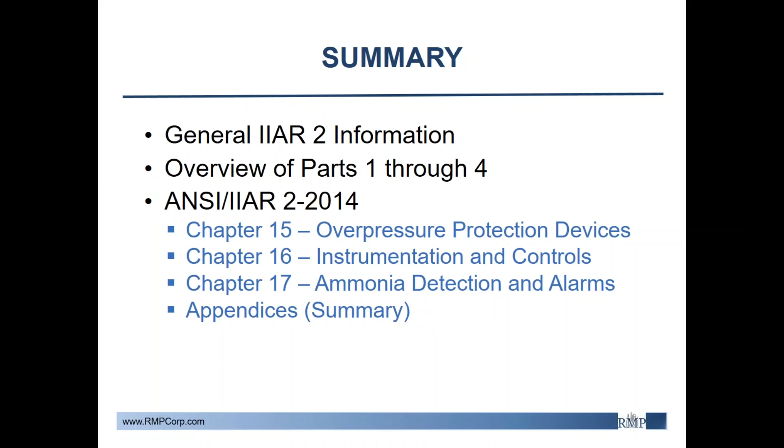15, 16, and 17 are actually probably some of the easier IIAR 2 chapters to implement as RAGAGEP. So I'll spend a little bit of time on that, and there's some extensive information, but we'll go through it, and I'll try to keep it as painless as possible.

This also is a reminder that IIAR 2 is for new system design, not existing systems. So this whole series has been based on IIAR 2 because there is no IIAR RAGAGEP standard yet, and we'll get into that later. IIAR 9 is in progress right now, and I have some dates that they're projecting for the release of that. So this presentation, as with the rest of the series, is formatted to take IIAR 2 and help you implement

and address issues that may be assigned to RAGAGEP under new design standards. Again, IIAR 9 is in progress, also IIAR 6 about the safe operations of the system, more into your maintenance and operating procedures, will also be developed around the same time frame next year. We'll talk about that a little bit later in the presentation.

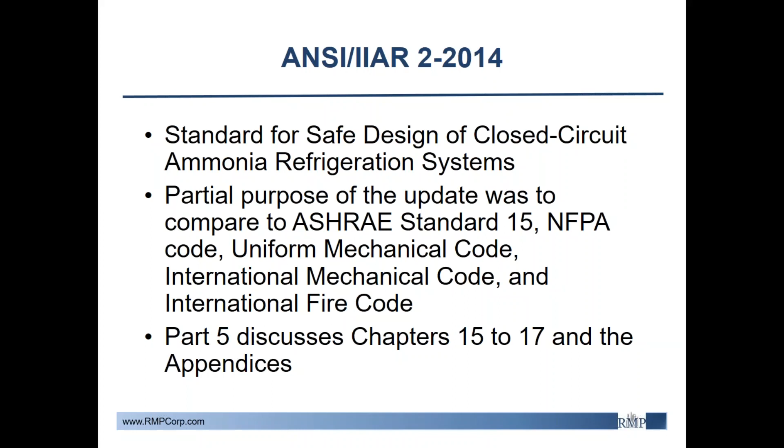It's also really important to remember it's never too late to start implementing RAGAGEP. Even if you're unsure, every little bit helps. Any assessment on what can be safer for your system helps.

We'll go through some quick definitions. A lot of them we've talked about before, but I always like to refresh and review for the ones that are most important for the presentation I'm giving. Authority having jurisdiction is basically your regulator or anyone else locally or federally or anything in between, where they have the responsibility of enforcing these standards.

Generally speaking, we're looking at the regulator for the facility, whether it be local or all the way up to federal. Authorized personnel applies to those that are trained and authorized to do a particular task or access a particular area. This is a big one. Whenever this is used, they're basically talking about authorized operator, authorized mechanic, someone who has the keys to a room that not everyone else has. So it's really important that there's this distinction between that and all the other employees on site.

Generally speaking, equipment is everything associated with the refrigeration system. I actually had this come up in the last few months where someone said, well, we never thought piping was part of the refrigeration system. I had never heard that before. I didn't know that was a challenge for some people, but it does include piping, your large equipment, valving, controls, anything associated with the system with controlling operations and maintenance is part of the equipment, generally speaking.

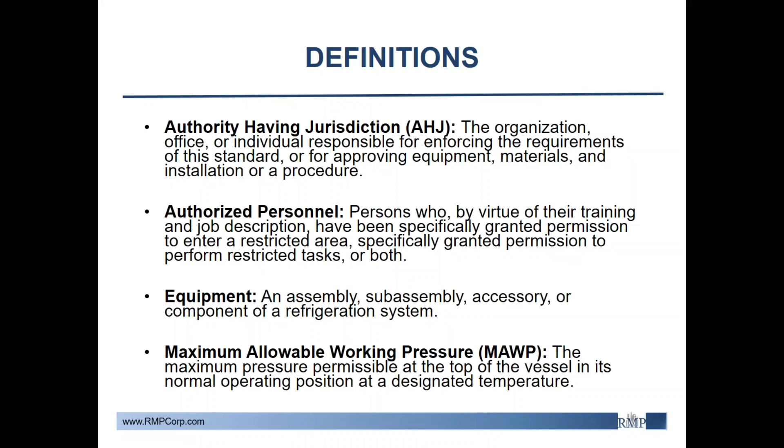Pressure relief valve, we're going to talk about these a lot today. Essentially, it's a device that relieves pressure. I think most people understand that. I pulled the definitions for the 3 pressure relief valves discussed in IIAR.

The hydrostatic relief valve is essentially designed to relieve pressure where liquid can be trapped. Pressure relief device is, more generally speaking, something that would automatically relieve excess pressure, so that could be vapor or liquid. It's just a more general term. And the dual pressure relief device is basically your three-way valve setup that we typically see with the 2 pressure relief valves, so you can isolate one and replace them and whatnot and have a backup.

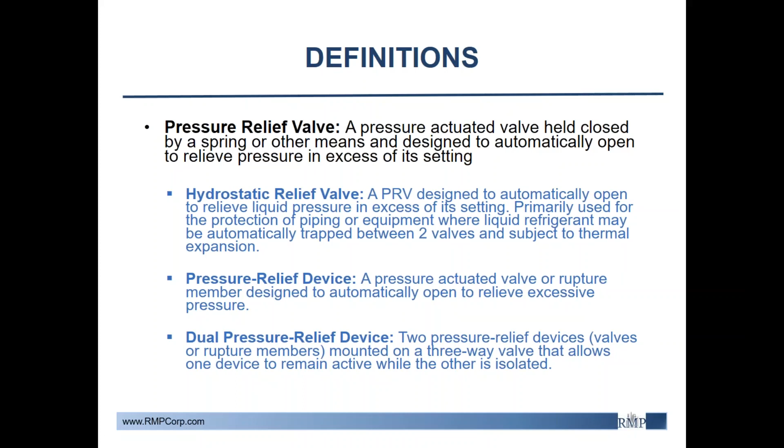Readily accessible is another big definition we've talked about this whole series. Readily accessible refers to anything that you may have to access as far as equipment, piping, valving for maintenance or operations. Essentially, if you have to get on a ladder or climb down a catwalk and twist over and lay down backwards to access a valve, it's not readily accessible. So this is stuff that's at normal person level. It can be up on a catwalk if the catwalk is easy to get to and easily accessible from the catwalk. We're just talking about no ladders and no weird contortions of the body to access things.

Shall not and should not are always terms I like to bring up. Shall is the mandatory provisions. Should are the recommended provisions. And basically it goes that even your shoulds should be followed if you can reasonably do that, and shalls are a mandatory thing. And 3-way valve, going back to our dual valve PRVs, basically a service valve that has a manually operated valve with 2 connections.

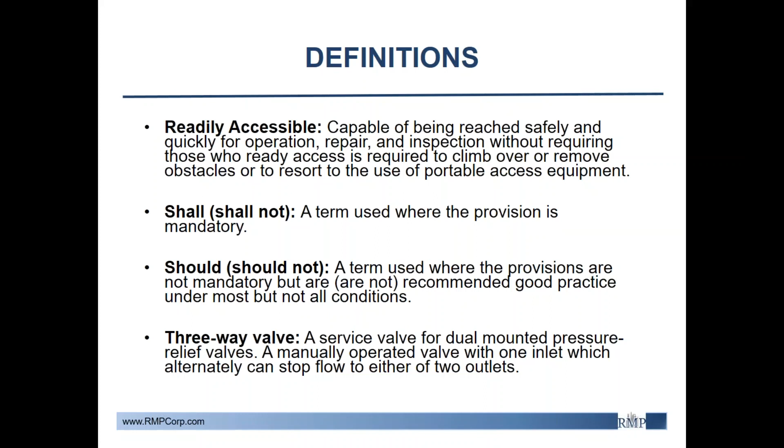So we'll talk about Chapter 15 on overpressure protection devices. 15.1 is a general clause. It's basically saying that pressure relief devices are going to meet the standards of this chapter. Almost every chapter has this general clause. I don't always write it in here, and this is one of those cases.

The overpressure protection devices do specify that excess pressure will be relieved due to fire or other abnormal conditions. Again, pretty self-explanatory. Most of us know that, but for the sake of stating the requirement, I like to do so.

15.2 for pressure relief devices just lays out some general requirements. One being that the system has to have at least 1 pressure relief device. Basically, you need to be able to relieve the pressure from anywhere in the system. And they must meet the ASME boiler and pressure vessel code. That comes up a lot. IIAR2 references that a lot. That's basically their mechanical standard or their material standard for most of the equipment in this standard. So you'll see that a lot, especially in this presentation for each device.

The installation should always allow for inspection, maintenance, and repair access, and this also goes back to readily accessible, that these should be readily accessible for access for any of these tasks. And if you're using it for vapor service, the pressure relief device should always be connected above the highest liquid ammonia level. That being said, there is an exception for that on, say, oil pots, where you may not be able to connect it higher than the anticipated liquid level, but you would just put it on the highest point of the oil drain pot instead. So there is one exception to that. If you're familiar with refrigeration, then you look at the designs, you wouldn't want to put your oil drain pot above, say, your compressor or something like that, where you wouldn't be able to drain your oil. So that's why they give you that exception.

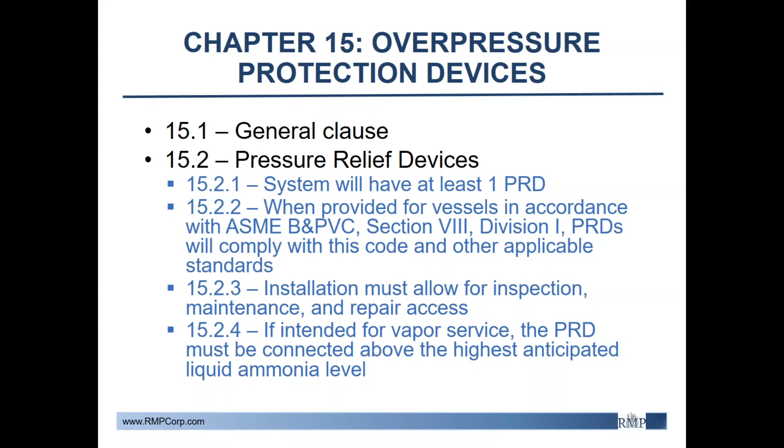The overpressure protection should also be installed as close as possible on the equipment being protected, and it applies to all similar applications. So if you have any other applications other than pressure vessels where you may need pressure relief, the same standards would apply to those applications as well.

Section 15.2.5 basically states that you need to prevent moisture from getting into the valves or the relief vent line. I think we can all understand what metal and water do together - you'd have a lot of corrosion and it would just be a nasty mess. So having vent caps, some kind of protection for that valve body against moisture, having everything properly sealed, possibly even coated or painted, will help protect the emergency protection you're trying to have with installing these valves.

Also, for setting or installing pressure relief devices, the pressure of the valve or device and the rupture member, if used in series, shall not exceed the design pressure of the equipment. Pretty self-explanatory, but you'd be surprised what we see as engineers. Basically, if you have a pressure vessel rated at 300 psi, you don't want a relief valve rated at 350. You'd like to go below 300 at a reasonable level in order to protect that vessel.

Also, there needs to be some means to detect pressure buildup. Usually I see a gauge, but there may be other methods - perhaps controls going back to your control system. Whatever works for a facility, whatever stage that facility is at, there just needs to be some method of detecting the pressure. As far as marking relief devices, they all must be set and sealed according to the boiler and pressure vessel code.

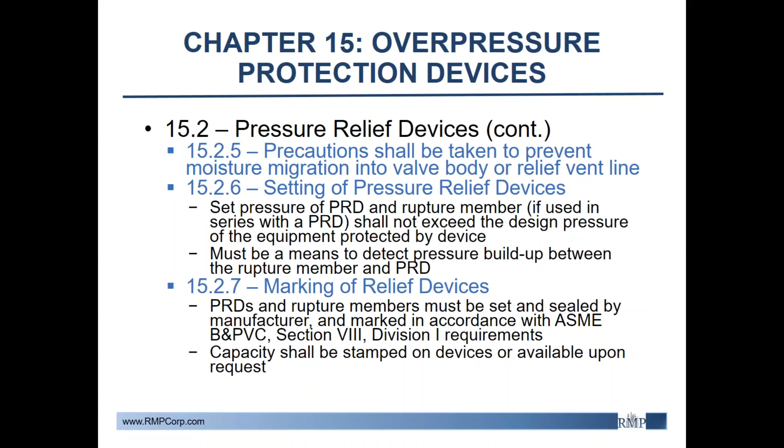So generally speaking about protection, all equipment should be built to ASME boiler codes and provided with certified pressure protection. Again, going back to the manufacturer, the testing certificate - you have qualified people installing and testing it, making sure everything's working as needed.

For the liquid vessels in your system, they have to have certified hydrostatic relief valves. This is pretty standard practice now, but if you don't have them, this is an easy one to alleviate from a RAGAGEP standard. Make sure you have these hydrostatic relief valves on your liquid vessels, or anywhere liquid can be trapped. It's an easy install, and it can alleviate that RAGAGEP issue if you're looking at possibly being deficient on that.

These hydrostatic relief valves need to comply with the ASME code we're stating, as well as section 15.6 of IIAR 2, which we'll get to in a few minutes. In addition, the sizing is in accordance with the section we'll be talking about next, section 15.3.7, where we'll discuss sizing and capacity.

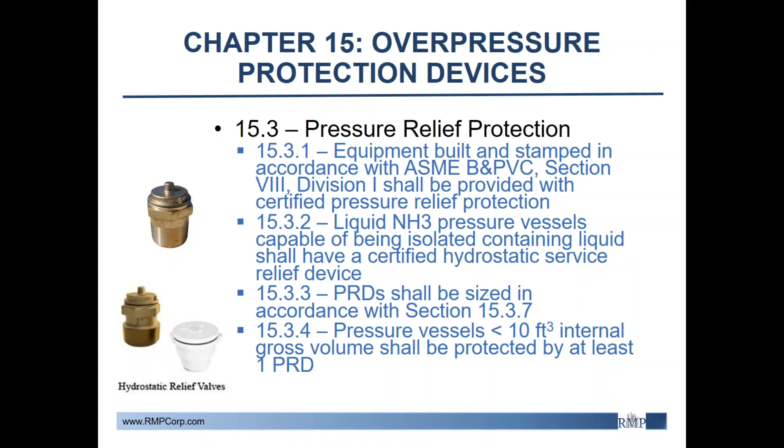Pressure vessels less than 10 cubic feet of internal volume must be protected by at least one pressure relief device. Pressure vessels greater than 10 cubic feet of internal volume shall be protected by at least one of the following. This is where it kind of gets confusing, but I'll help explain it.

Either one or more dual pressure relief devices installed with a three-way valve, or a single PRD. So you have the option - and again, these are minimum standards. You should always go with the safest standard that applies, or the safest installation. But you can have a single PRD, or they give you that extra option - maybe you should put some dual PRDs on these.

Have that backup plan just in case you have an issue. It's really based on the volume. You don't want that pressure to build up where this large volume would be an issue. So there is a little bit of difference at that threshold, but essentially they are the same requirement.

In addition, the dual PRDs must comply with the sizing that we're going to talk about on the next slide. They must set to a fully seated position, and the sum of the capacities must equal or exceed the requirements in 15.3.7, again on the next page, so we'll talk about that.

The three-way valves must allow for testing or repair, and when you talk about the single PRDs, the vessel can be isolated and pumped out in order to maintain that device or replace the device. And they should be on the low side of the system if you're only using one. So we're talking about the low pressure side of the system.

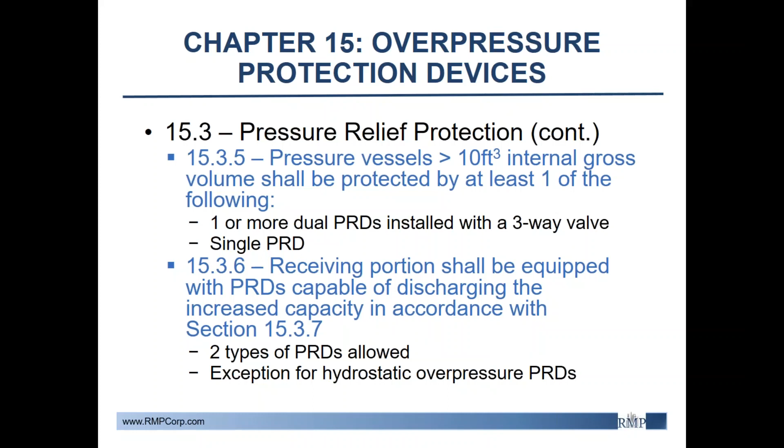The hydrostatic overpressure protection, basically they can be discharged to other portions of the system as long as those portions of the system are protected by PRDs. And again, in accordance with all the sections that apply, they would be like normal pressure relief devices, just a different part of the system, but you can connect hydrostatic relief back up into a different part of the system. For instance, if you want to put it back into a large vessel, it can handle higher pressure.

For 15.3.7, this is the capacity and the determination of flow rates and everything we've been talking about, so I'll go through this a little bit.

Basically, there must be sufficient mass flow carrying capacity within the vessels and within the relief protection system, the whole system, not just the valving, but the piping and everything that goes along with this part of the system, basically to prevent catastrophic failure. You don't want your emergency protection device to fail. That's your last resort. In a perfect world, we would have nothing go wrong and you would never use the pressure relief devices, but that doesn't always happen. And so this is your last resort and it cannot fail, which is basically what this is saying.

So to ensure that you have plenty of capacity there, they've listed out a number of considerations, including fire, any kind of isolation that will result in thermal expansion, some kind of internal heat load, and then there's this general other category. Basically considering any other overpressure conditions that may cause some issues in your system and utilize the pressure relief system, you need to account for all that capacity.

The minimum relief capacity depends on the equipment, the effects of the inlet pressure losses, and scenarios under which overpressure is being created. Again, going back to the second bullet of all those considerations that you have to take into account. Also, they must include heat loads from cleaning operations and process loads. So any kind of extra heat load that may expand your gas in the system is a possibility for extra capacity or overpressure. So those need to be considered.

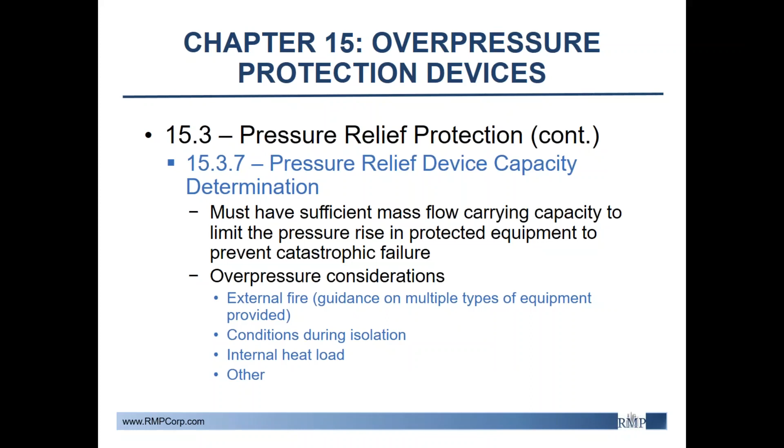There are formulas in IIAR2 specifically for pressure relief capacity. Take a look at those. That's good guidance as far as how to do it and what to consider. All the factors are in there as far as conversion and things like that. So those are good resources.

The capacity factor should be increased to 1.25 where there's combustible material within 20 feet. That's just a general standard. And the discharge capacity, again, should follow the ASME code and markings in accordance with 15.2.7, which we already talked about, the capacity rating stamped and available. Again, going back to your PSI, making sure you have all that information available. There's also equations for discharge capacity under critical flow conditions. Make sure you're using those equations in 15.3.10 if needed.

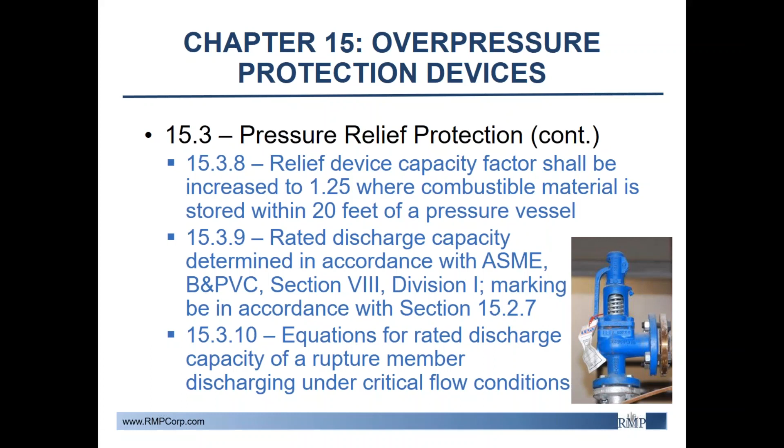Stop valves are not to be installed in the inlet piping. Those need to be free of any kind of blockage or anything to relieve that pressure. Again, you don't want your emergency system to fail.

Anything that's discharging to an external system is not considered part of the refrigeration system. So there is a division on where the refrigeration system ends. For instance, if you're discharging to atmosphere, that's basically where your system ends. That's an easy example. There may be other examples of external relief, but that would be an easy one to use.

Also, the stop valves on outlet piping have to take into account the pressure drop, and then they need to be locked open as well. So if you have stop valves, they need to be locked open, but they have to have the capacity, that diameter, to allow the capacity of that full pressure relief to go through. So no pinching the capacity flow when you're trying to discharge to another device or from another device, either or.

Piping, again, going back to this capacity flow, piping should not contribute to pressure drop. Again, you don't want to squeeze that capacity or that flow down where you're not relieving properly. You want to make sure this is designed so that you have the full flow through the piping, the valve, and all the way back. In California, we're used to diffusion tanks, all the way back to your tank or your flaring system or whatever you're using for the discharge point.

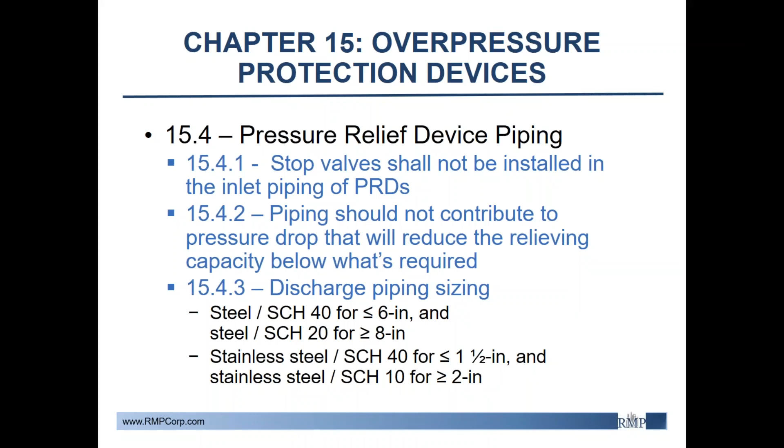This is listed in section 15.4.3. So if you have any questions about that or need to look up those specs, those are sitting right there in the regulation.

Again, the discharge pipe should be no less than the outlet size of the device. We've been talking about that. Just don't pinch the flow out. The minimum size and the total equivalent length shall be determined based on the sum of the discharge capacity.

So you need to account for all the capacities of the PRDs if they're expected to discharge simultaneously. So if you have three pressure relief valves that could discharge at one time, that piping capacity needs to accommodate all three of those for the length of time and the flow that might be going through there. So that's something to keep in mind. Again, it's in the equations. There's a lot of guidance in the IIAR2.

Please utilize that if needed. The 15.4.5 talks about where the liquid ammonia can be isolated. Basically looking forward to 15.6, we'll talk about in a few minutes for hydrostatic relief, but basically protection against overpressure. Just a general statement for the piping that there needs to be some kind of pressure relief there.

Discharge piping shall be supported in accordance with section 13.4, which covers piping hanger supports and isolation requirements. This includes the structural integrity of supporting the piping and its contents, preventing damage from vibration, stress, corrosion, and physical impact. Any attachments or methods should support applied loads, so on the civil engineering side, make sure pipes and valves are supported.

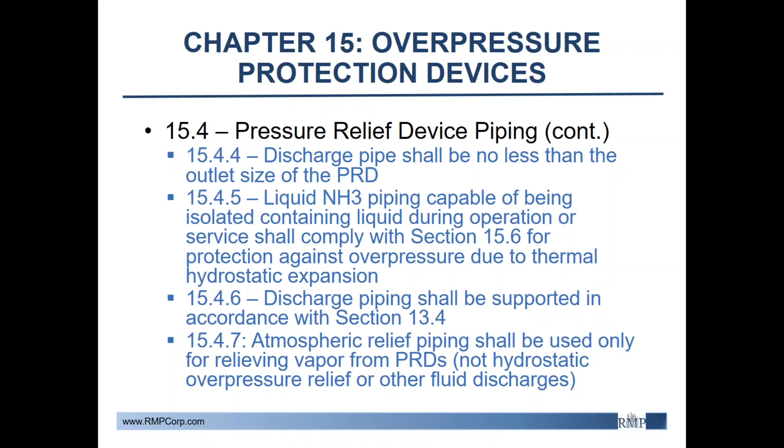Section 15.5.1 talks about vapor being discharged directly to atmosphere outdoors. This outlines exactly what's required—the maximum length of the piping shall be determined by the equations in the section. There's a section on how high above breathing level or building height you must discharge, to prevent hurting someone in the community or one of your employees. It's important to look at those if you're attempting to discharge to atmosphere.

That said, there are exceptions to discharging to atmosphere, especially in California, where we're required to use a diffusion tank or diffusion system. So check your state and local regulations—your local regulator may have a different view on things. Make sure you're talking to your regulator if you're unsure what's allowed where you are.

There is an allowance if you do not want to discharge to atmosphere. You can discharge into a treatment system, a flaring system, opt into a diffusion system, or any other approved means authorized by your regulator. So talk to the authority that has jurisdiction over your area to make sure there's understanding on what you're allowed to do.

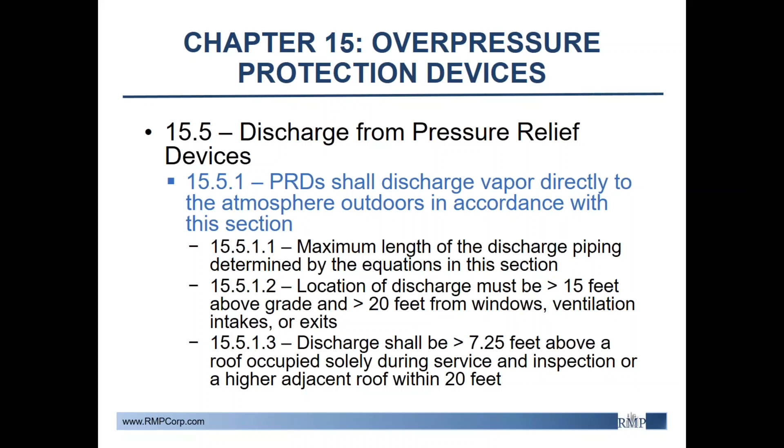Diffusion systems are required in California, and we'll also talk about them in 15.5.3 for those that might want to opt in or already have one at their facility.

Continuing the discharge piping requirements, piping must terminate greater than 7¼ feet above platform surfaces—we're talking about catwalks and things like that. The termination must be directed upward; basically, you don't want to blow ammonia gas right into someone's face, and you don't want it blown down toward the ground. A lot of this stuff is intuitive, but you'd be surprised what's out there sometimes.

I've actually seen this situation in a PHA where they had a pressure relief relieving right into a main walkway for operations. It was something they obviously fixed—they had a recommendation for it—but just be careful and make sure everything is following these requirements, at least at a minimum.

Also, there should be some provision for draining the piping. Even if you do your best to keep water out of it, it's possible you could get water in the piping. Having some kind of drain, or a way of draining that system between needs—maybe during the dry season when you know you won't have rain or snow—would be a good time to do it.

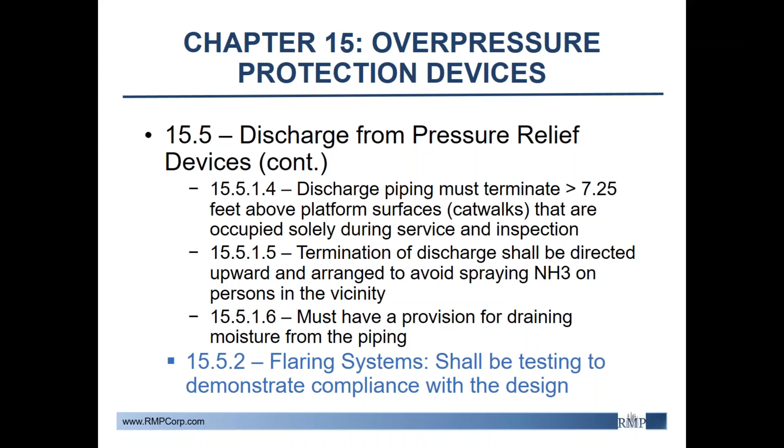Section 15.5.2 talks about flaring systems, which need to be tested to demonstrate compliance with the design. Water diffusion tanks need to be sized at 1 gallon of water per pound of ammonia released within 1 hour.

That requires a little bit of effort as far as determining your capacity, which you should already have, but also what would you be discharging, how much would be discharged in an hour, and then determining how much water you would need in that tank.

With diffusion tanks, you also need to prevent this water from freezing. Most parts of California where it's required, we don't have that problem, but other parts of the country definitely do, so keep that in mind. You may have to do something, maybe some kind of heater, or a chemical you can add to prevent freezing that won't affect the absorption of ammonia and the operation of this tank.

You never want to affect the operation. You want to operate as planned, but there are methods to prevent freezing.

Piping should distribute the ammonia to the bottom of the tank, but more than 33 feet below the liquid level, so you want to get that down into the water. You want that water to react with ammonia, attach itself, and you basically end up with aqueous ammonia. There may be some restrictions on this just based on, well, we'll never get 33 feet of liquid level.

The discharge piping should basically go down to the bottom with just enough room to allow the ammonia to escape into the water. The tank should be large enough to contain the water and the ammonia without overflowing, so you have to account for the extra capacity of ammonia, probably have some headspace on top as well.

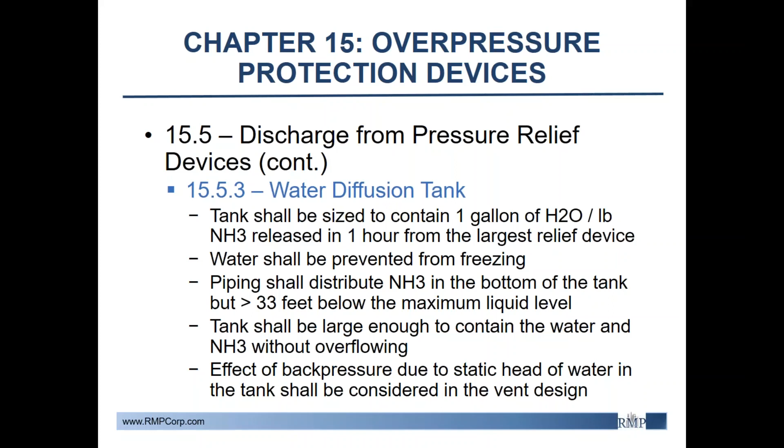The back pressure due to water being in that tank needs to be considered during the vent design. You should not have any kind of back pressure putting pressure on those relief valves where the valves will not relieve. So making room for that and addressing that issue during design is important.

Hydrostatic overpressure protection - basically we're talking about liquid lines and the hydrostatic expansion of trapped ammonia. This is where those hydrostatic relief valves come into play. They need to relieve automatically during normal operation and during shutdown.

In addition, any kind of planned isolation should be on standby or for seasonal conditions. So if you're trying to replace them out or whatever, it needs to be scheduled and planned out. And equipment or device fault needs to also be included in its operation.

There is an exception for maintenance and service operations using engineering and administrative controls for trapped ammonia. Say if you're taking that valve out to replace it or to test it, there is that allowance there, but it should be a temporary allowance. You shouldn't be operating like that on a normal basis.

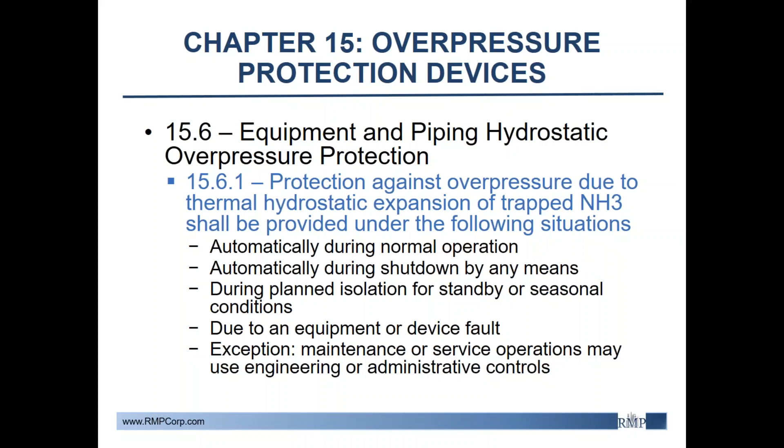One or both of the following should be used when talking about hydrostatic overpressure protection: a static relief device or check valve should be provided to relieve another part of the closed circuit system, or an expansion compensation device. We can get into engineering of this, but basically, providing that extra protection for your system.

Having that backup plan - these can fail, so making sure that you have the allowance to protect that thermal expansion that could happen in trapped liquid.

Frankly, it's probably easiest to try not to design a system that can trap ammonia. If you have two valves together that don't need to be there trapping ammonia, it's probably best to just take one of them out. But with the need to isolate equipment and things like that, of course, that allowance needs to be made as well, and it is possible to have those situations within the system.

As in section 13.3.5, which we talked about in another presentation, the relief valves should not be used as shut-off valves, so they shouldn't be programmed or controlled in any way to shut off the flow. These are pressure relief devices, and they're used basically on an as-needed basis.

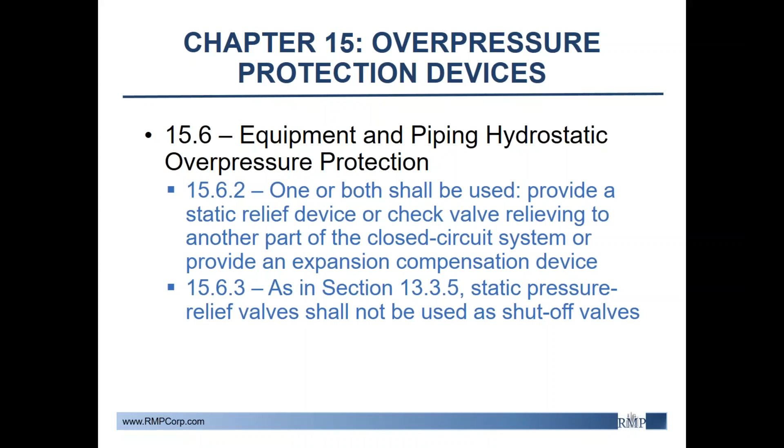Chapter 16 talks about instrumentation and controls. Again, the general statement is that all instrumentation and controls shall comply with this chapter. But basically, controls should indicate the operating parameters to the system and the ability to manually or automatically control the operations of the system.

These controls should also be able to provide notice of what the system parameters are and what it's doing, and if any parameters have exceeded. So having those notifications, having those alerts on the screen, that's all included with the requirements as far as the instrumentation and controls.

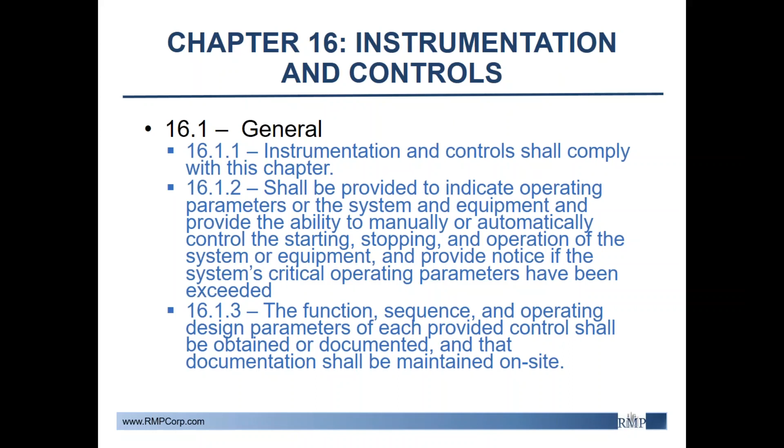The function, sequence, and operating design parameters shall be obtained or documented and maintained on site. Going back into your PSI, you should have this anyways if you're using controls, but to have the user manuals, the set points of equipment, how the controls are being used, your P&IDs updated with controls included on your P&IDs. All this goes into documenting what your instrumentation controls are doing.

There shall be a means provided for monitoring concentration of ammonia. We're talking about alarms and sensors in the event of a power failure. And we'll talk about alarms and sensors in the next chapter as well. But those should all be connected back to the controls to provide alerts, whether it be audio, visual, or just notification.

Also, any kind of safety settings that are going to be changed should be limited to authorized personnel only, going back to that special category of operators and employees that have certain access to different things. That's your protection on controlling the system, at least in part.

Having these controls behind locked doors with passcodes for people to get into, with a second confirmation that you want to make a change, similar to what we see maybe on our daily computers where they ask, are you sure you want to delete this file? It's the same thing. Are you sure you want to delete or you want to change this set point? Those kinds of programming will help maintain the system and alleviate any mistakes that might happen.

The electrical controls, generally speaking, should comply with any electrical code that's applicable. It's usually the National Electrical Code, but there may be some local standards as well in the building codes. It's important to just check those out.

Also, the maximum allowable working pressure of instruments and liquid level indicators should be equal or greater to the design pressure of the system in which they're installed. So if you have a piece of equipment or a vessel or piping that you're monitoring, you must have those controls if there's anything that's coming in contact or anything that may be at a working pressure has to be equivalent to what it's connected to.

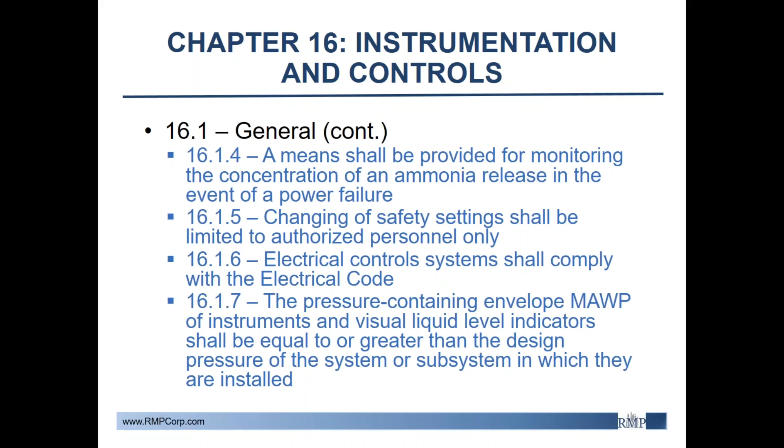So we don't want to overpressure controls inadvertently, and similar to pressure relief devices, you want the pressure relief device to relieve before you've already lost your tank. You want it to be around the same and protect that.

For design and selection of liquid level indicators, basically using a performance-based design, and that you're following section 5.5 for design pressure. I won't go back that far. I think we've talked about it a few times as far as the design pressure. The requirements are in, I believe that was the second part of this series that I did in chapter 5. But going back and looking at that for design pressure of the liquid level indicators.

Sight glasses and linear liquid level indicators shall not be installed where there's risk of hydraulic shock. Again, you don't want to blow out your equipment at a weak spot. You want to protect those. So making sure that those are installed at the correct points of your system.

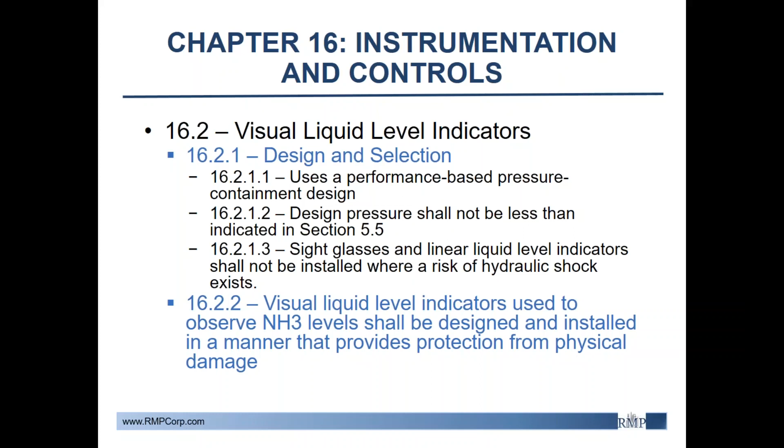These indicators that are used to observe the ammonia levels shall be designed and installed in a manner that provides protection from physical damage. Again, protecting your system, not having weak spots as much as possible is really important. And that can be done as a RAGAGEP as well. If you're replacing your level indicator, you can replace it with something that is more robust, maybe better materials and things like that, or maybe you have some kind of electronic controls on it that work better.

The indicators shall be fit with internal check type shutoff valves, again in protection against accidental breakage of the glass tube. Again, not releasing ammonia. We want to protect the system. We want to have robust materials that won't cause any issues with operations.

And then we talk about bullseye sight glass types. Basically, they need to be compatible with ammonia, and they need to be sized for the application. So a traceable serial number is really important. Again, going back to your PSI and making sure that you're sizing everything appropriately. It's all important for not only design but RAGAGEP as well.

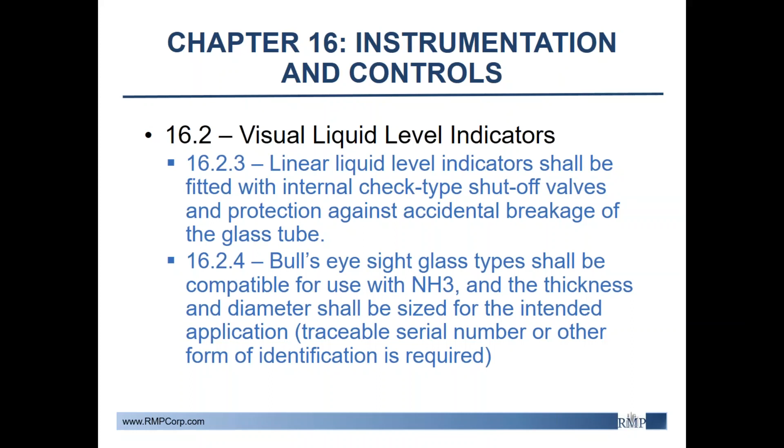16.3, we talk about sensor controls. The sensing devices that initiate control need to have the same design pressure as the other equipment. Again, going back to 5.5, the design pressure is really important, that you don't have a weak spot in your system. It would be good to go look at that within your system and make sure you don't have any weak spots if you haven't done that in a while.

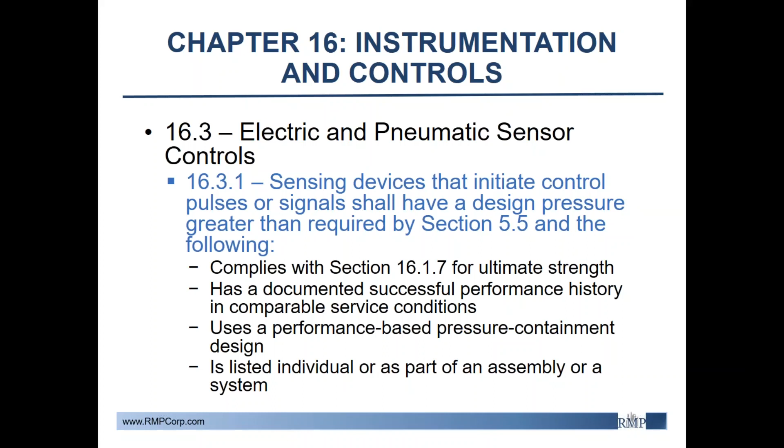These must comply with section 16.1.7 for ultimate strength. We talked about that a little bit. It's also listed in IIAR 2. Also documented performance history for similar service conditions, performance-based design as well, and listed individual or as part of the assembly of the system. So having those specs on your sensor is important.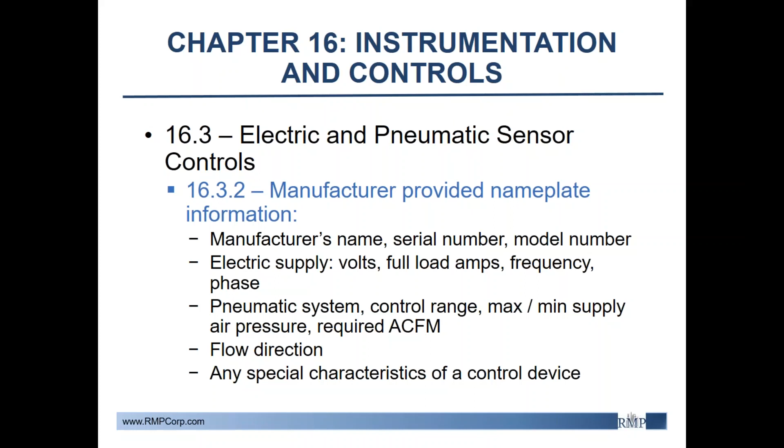Chapter 17 is ammonia detection and alarms. This is probably one of the easiest RAGAGEP requirements to meet, just because alarms and detection are pretty easy to install and maintain. So if you don't have this or you aren't following these requirements, I would recommend you take a fresh look at your facility and the system and see where you can improve. This would be an easy one to do, in my opinion.

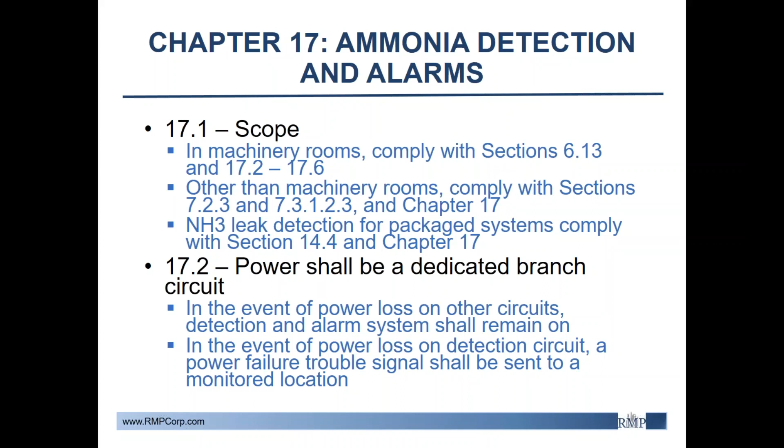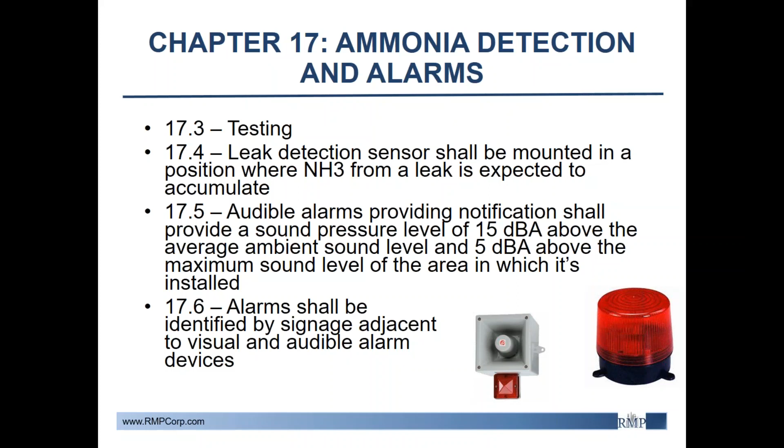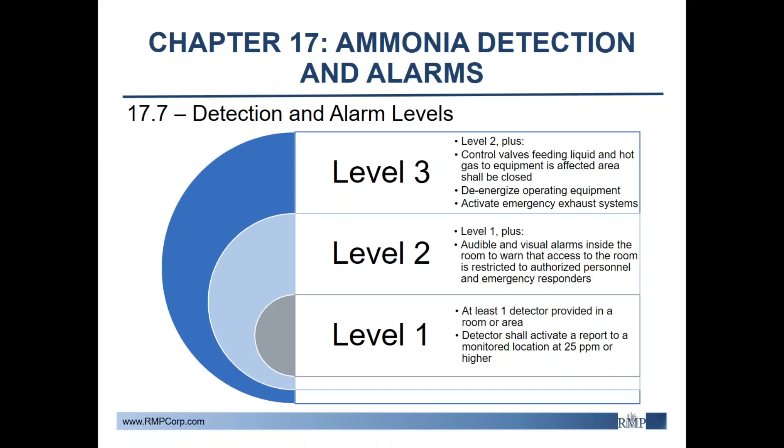Level 3 includes levels 1 and 2, plus control valves being automatically closed in the affected area, and possibly de-energizing the operational equipment. So cutting off that electricity automatically, de-energizing those, making sure the control valves are shutting properly, and emergency exhaust systems being activated. Basically full controls on everything at level 3, and that I believe, if I remember from chapter 14, was 100 or 150 ppm, and I did not put that in here, and I should have, but you can go back and look that, or if anyone needs that information, I can go ahead and look that up and supply it to you.

Just real quick about the appendices, I didn't want to go through them because they're mostly informative. They support all the standards that are written, so I just listed a summary of what's in here, what's included. The information is helpful for reference, and includes calculations and examples on how to meet compliance. If you don't have a copy of the standard, I recommend it, but I just wanted to list appendices.

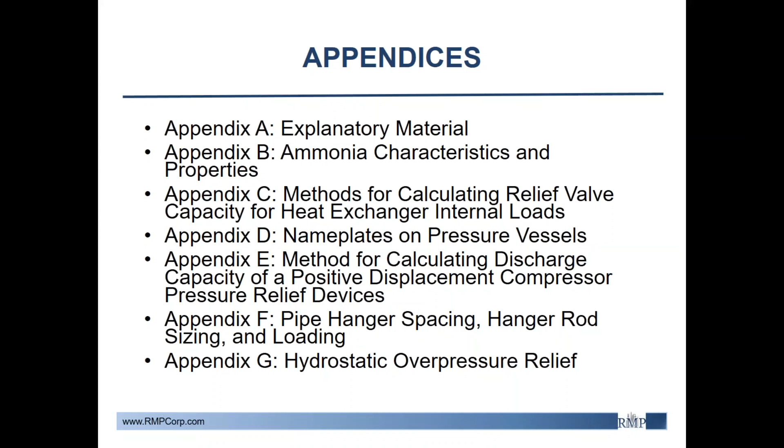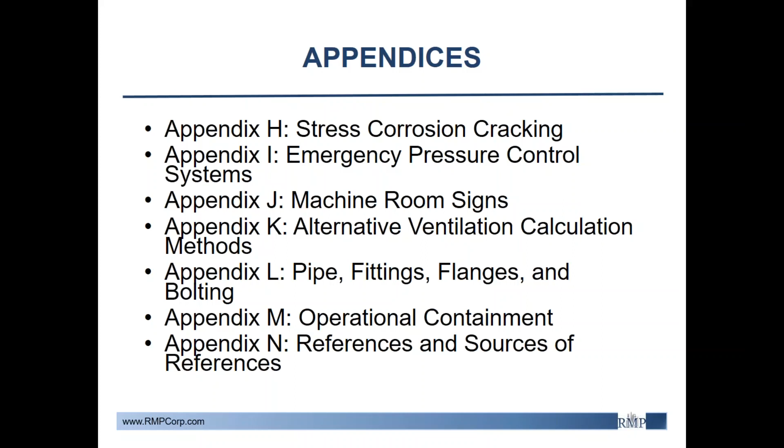There's Appendix H, talks about stress corrosion cracking. Then we get into emergency pressure control systems, machine room signs, which gives you a couple examples of what kind of signs are required and how to effectively use your signage on the door of your machinery room or other doors in the facility. They also talk about alternative ventilation calculation methods, so looking at the ventilation systems and how to calculate that. Any requirements for pipe fittings, flanges, and bolting is in Appendix L. M is operational containment, and N is all the references and sources of references for the standard.

So let's talk about what's next. IIAR Standard 9 is projected for release in 2018. I believe right now they're just focusing on getting it done by the end of the year because it has to go through the ANSI process. It can be a lengthy process, and that's why they've been pushing it back a little bit here and there. Right now they're scheduled for next year, and they're really pushing through on that.

Once we have Standard 9, we have a defined scope of what RAGAGEP means in the ammonia refrigeration industry. We will have a set of standards that says, in order to meet RAGAGEP, this is what you have to do. But right now we're operating in a gray area, using the design standards for new systems to apply to existing ones. So that'll be more helpful. It is important information to know.

Until then, RAGAGEP still means striving for safer practice. So looking for improvements, providing feedback on IIAR 9 once, I believe, it was already released to the public. I'd have to ask Tony Lindell on that, and he might be laughing over there if he's listening. But I believe they're in the process of finalizing all that, taking all the comments in. I'm sure they'd be happy with a little bit more comment. I don't know if they'd implement it, but some input is always helpful.

Also, involving employees and personnel at your facility to address safety issues. They're going to notice things you may not, if you're a manager busy running around doing all sorts of things, and your operator says, hey, we've had issues with this equipment, or I saw that we could really use a sensor over here or whatnot. Make sure you're talking to your operators, your personnel, your employees, making sure that things are operating well, that you have some of the stuff in place, if not all, and any improvement areas to plan ahead.

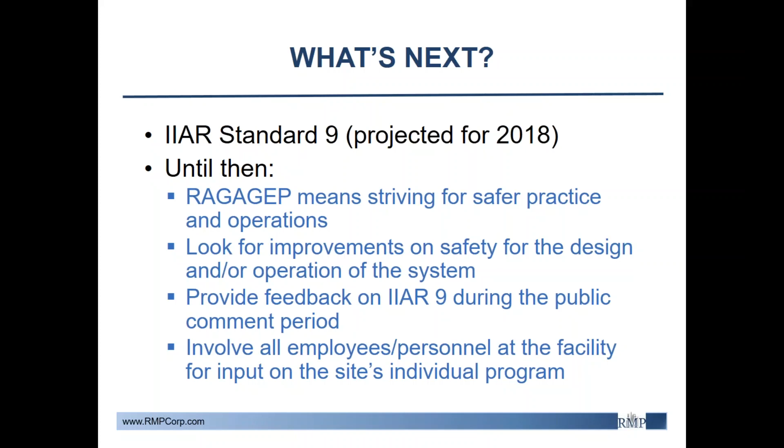Also, we're going to be at the National IIAR Conference. I will be speaking there at one of the presentations, and also we will be exhibiting in a booth. A lot of you will see those emails go out as we get closer as to what booth and where to find us. If you have any questions, I'd like to open it up for questions now.